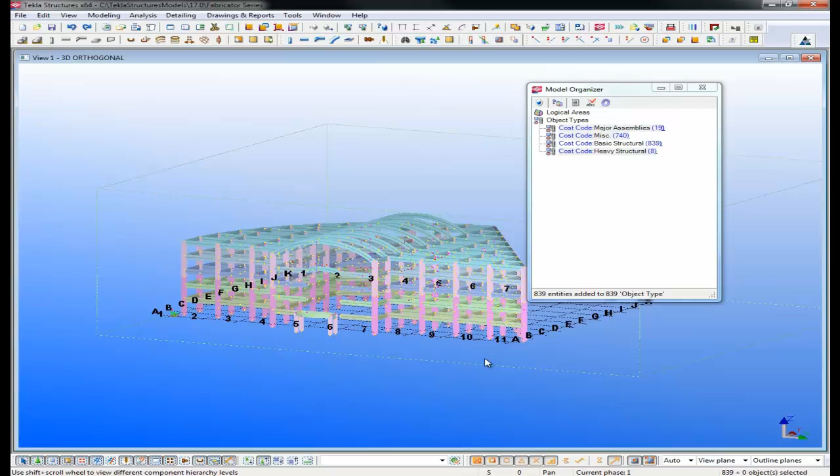Hey Lee, one other question coming in right now is about making the estimate a little bit more accurate by adding connections into the model. Can you maybe show something with that?

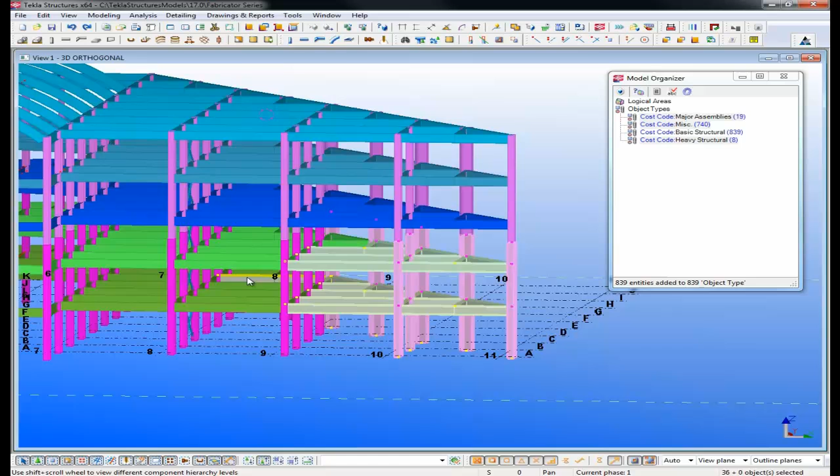Yeah, so what we could do, if you didn't want to take the time to add in all the detailed level connections, let's highlight this area here real quick. We'll grab this small section and come up to auto connections, and there's a couple things you could do within this dialog box. You could put on simple clip angle connections depending on the scenarios in the model. You could put on actual shear tabs, which gives you connections with the bolts, cuts the beams back and copes them out. Or you could just put on the actual fittings.

If you put on fittings, you can set it so that if you had a beam coming into a column flange, the way we have it modeled is point to point. So from the center of the column out to the end of the flange is basically extra junk material that's going to be thrown away. So you could apply the fittings to have it cut back to all the different faces.

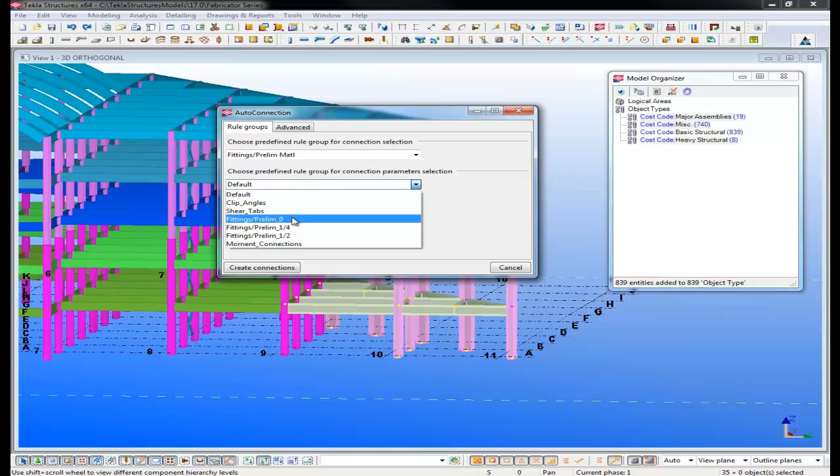So depending on how accurate you want to be or what you want to show in your estimate, you could choose these. I'll just throw on some shear tabs and run these connections here. That'll cut everything back to length and also apply the shear tabs and bolts required for this as well. It may struggle.

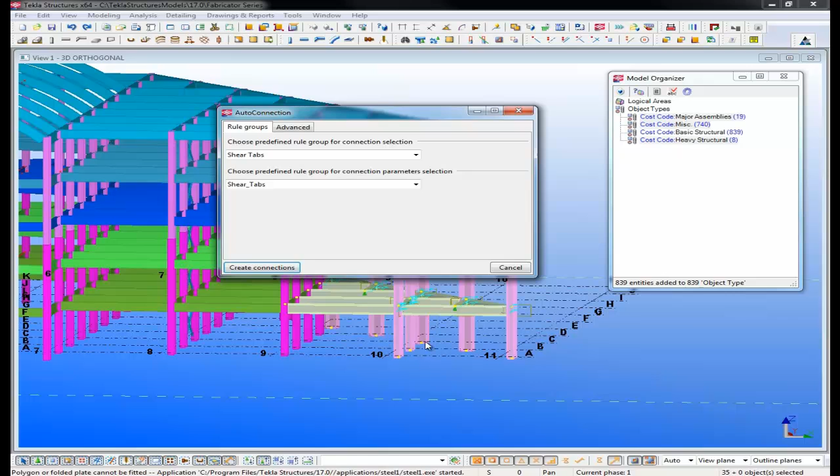This is a system that we've developed and localized here for our Tekla users, but of course if you had your own auto connection system, you could develop that yourself. It's basically just a set of rules that defines what you want to do where one piece of steel hits another piece of steel.

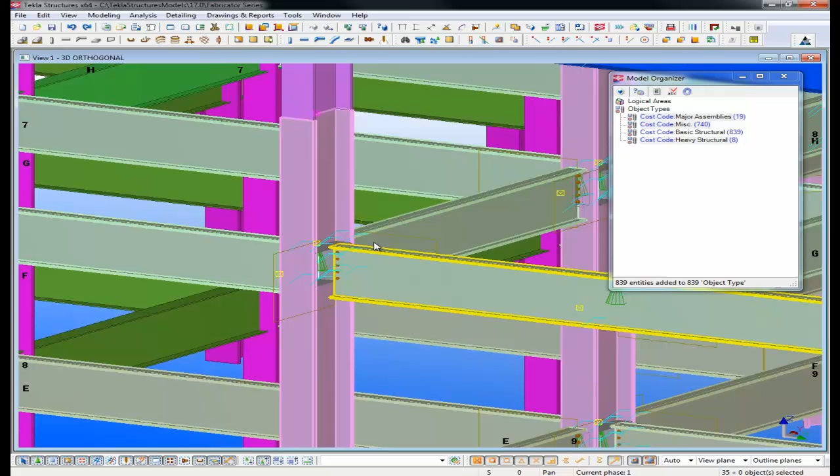Yeah, exactly. You're just defining rules, like if I have a beam going into a column and it's a perpendicular situation, use this connection. If it's skewed, use this connection, or whatever. It just runs through the different rules.

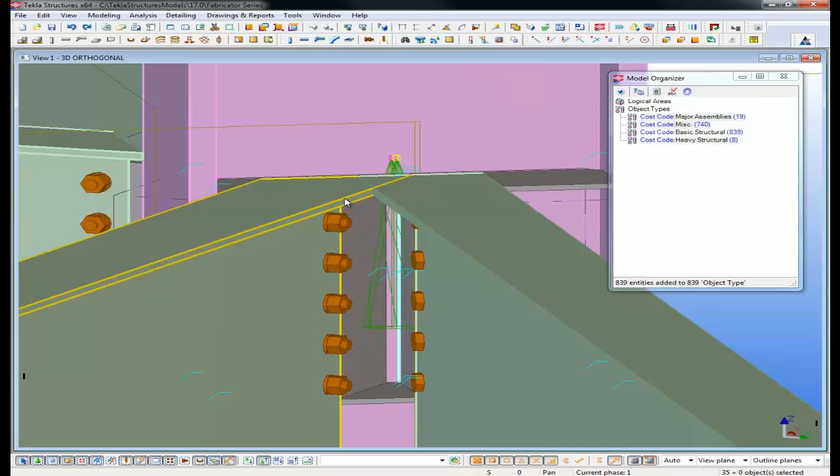Now it might show, if you zoom in where those awkward skewed connections are, something that's not perfect, but it should be enough for an estimate. It's not going to be the final detailed solution, but it will still give you good value of information based on the rules you specify. That will give you a fairly accurate estimate.

Yeah, so your beams will be cut to length and everything like that. So depending on how detailed you want to get, you can most certainly do that. Okay.